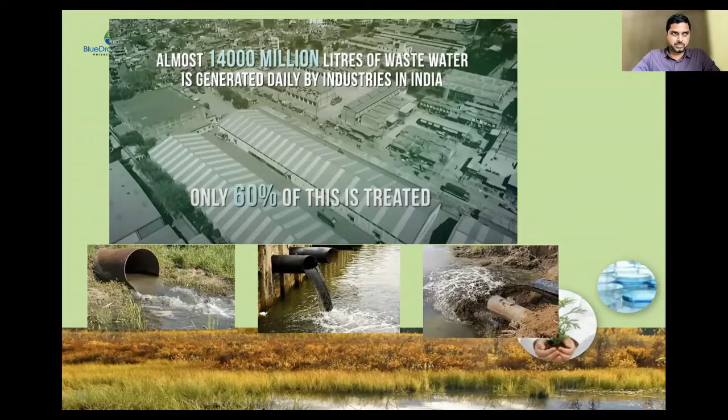So the environmental laws say that the wastewater generated from any source be treated to certain parameters and then be let into downstreams, whether water bodies or nalas, or used for gardening or other reuse purposes. There is a legal binding for every institution, whether academic or non-academic or industry or a residential complex. I think if we have more than 40 families living in an apartment complex, you are required to treat the wastewater.

So while the law prescribes that we need to treat all these waters to this level, I personally feel it is our moral responsibility, our commitment to the future, that for all the resources we are using, as much as possible, we have to resolve the pollutants and make them available for future generations free of pollution. So it is a responsibility from the citizen side too, and from the institutions, whether legality demands or not.

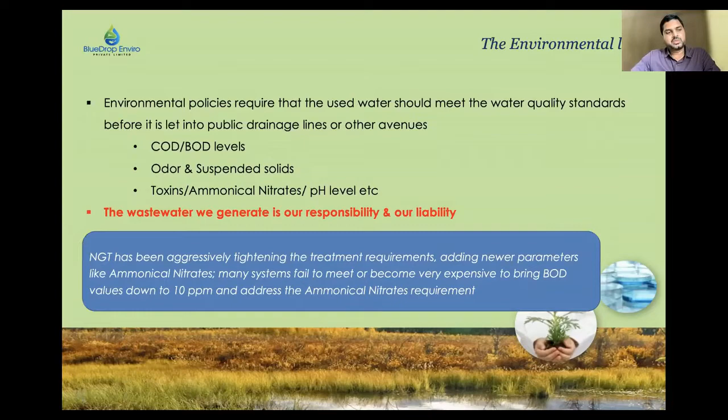There are several conventional treatment systems that have been in place. India has adopted these technologies from various countries back in the 90s or early 90s. Before that, we haven't seen greater implementation of these treatment systems. But when we downloaded this knowledge from various places, we started implementing this left, right, center, sometimes with understanding, sometimes with not so much understanding. As a result, Naam ke vaste several systems have been set up, but not many are functional. I'll explain the reasons as we go through these presentations, of what is the source of these issues.

As people who are interested in a practical future for your own lives, are you all students from the mechanical engineering department, or are various departments here? Is there anybody from various departments? I think various departments. Wonderful, good to know that.

So as you see a career in real life, it is very, very imperative for you to understand the science and technology ahead of time, apart from your academics. It helps you really focus yourself on what you want to achieve. But

the systems that have been implemented widely across the country have been producing results, but partially. The main systems that we have observed in the market are dealing with chemical treatments, especially when it comes to effluent treatment. And there are electromechanical treatment systems, which are called SBR, sequential batch reactor, MBBR, ASP, and membrane bioreactor. These are very popularly used in both residential and some of the industrial segments.

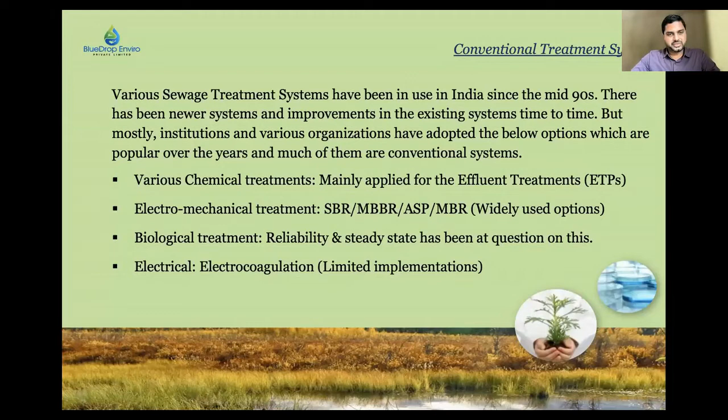On top of it, every now and then we hear about biological treatment systems. There are many success case studies, but the reliability and steady state, as mentioned here, has not been very well established. So people are not able to rely completely on biological treatment. It has to have a combination of things. And of course, there is electrocoagulation that is widely used in some of the industries, but it's very limited in its approach.

So if you have not seen treatment plants, some of them look like this. Some of them can be better than this in terms of their look and feel. Some of them can be more compact than this, because at least 5 of these 6 places I have personally visited and taken these pictures myself. You can gather a lot of data just by seeing these images: these are built with cement and concrete, there are steel structures, some equipment, some pipelines, and the water is visible, and water is moving and is being churned.

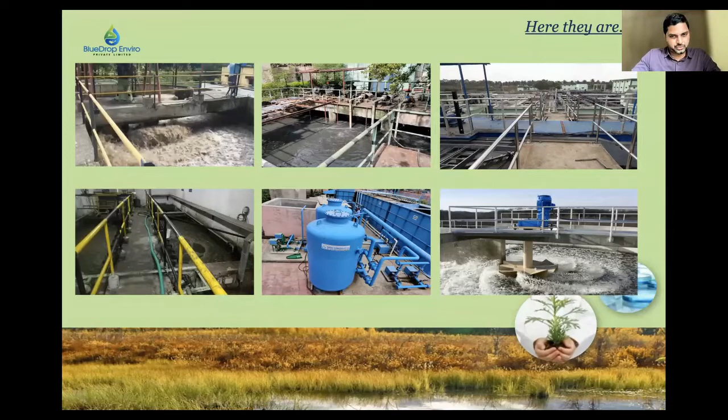What else do you see? Anything interesting? Somebody says, I'm seeing blue color. That's all right. There are filters, right? So this is a combination of several things displayed here; these are all the treatment systems that are treating the wastewater. These are the conventional mechanical systems. They are addressing the problem, as I said, but not in a holistic way.

What do you mean by a holistic way? This word is used in many contexts in life. Holistic approach to education, holistic approach to problem solving. Here I'm talking about a holistic approach to wastewater treatment. Somebody wants to say something? What is holistic? Overall. Right. Anything else?

Well, we move on. So when I say it's not in a holistic way, somewhere it is not covering some aspect that is connected with the treatment or the environment or the overall picture. So there are some critical decision-making factors that we need to look at before setting up a system. We can learn about this in the next slide. An integrated approach, absolutely. Integration means bringing everything together, making sure one is not taking a beating because of something else. So that integrated approach is missing in many of these plants. The real concerns on finalizing a technology, choosing a technology, implementing a technology come here.

The first and foremost thing is people still call us a developing country. And many of us don't deny that. We are still developing, we are still learning. Finance is one of the most important criteria for us in deciding anything and everything, whether you want to buy a car or a scooter or join a college; in other ways, finance plays a major role. In some places, finance can take a second role and quality takes the first role.

So these are the real concerns that we have to observe in understanding a system, designing a system, or choosing a system. We talk about sustainability everywhere. We talk about sustainability as youngsters. Now, when you go into real life, you start to build your home, you start to take employment, get married, whatever. The first matter that comes is, can I sustain my life with the income that I have? What do you mean by sustain? It's not about just paying your rent.

Sustainability has multiple pillars. In environment, when it comes to wastewater treatment systems, we define sustainability as given here very clearly. While we treat the water to provide clean water and a healthy environment and do not disturb the equilibrium, a sustainable system has to be economically viable. Socially, it must be acceptable. Technically, it should be appropriate. Institutionally, it should be appropriate, and it should protect the environment and natural resources.

People ask, what is being socially appropriate or acceptable? We develop a colony, there are 200 plots, and one of the plots I allocate for STP. I bet nobody would come even close to the STP. Nobody will buy those plots because socially these are not accepted. They're not acceptable. So these are the various factors that we need to look at and meet at a place where it is comfortable for all of us to call it a sustainable system.

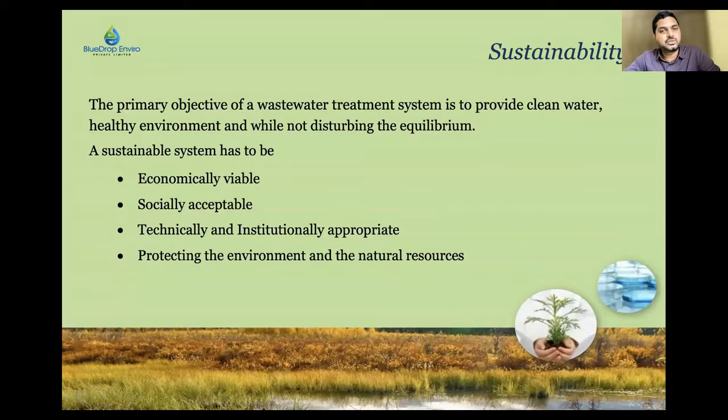A lot of people loosely talk about green technology. And when you ask the definition, it is what is shown in the dictionaries. It's technology which is intended to mitigate or reverse the effects of human activity on the environment. Often clean tech or green technology refers to technology that is considered environmentally friendly, based on its production, process, and supply chain. While it's being produced, while it's being processed, and even in the supply chain, nowhere is it to disturb the equilibrium of the environment.

Supply chain, I just take a simple example. Every second day you're importing things from, say, Delhi or Varanasi or Jaipur to Bangalore. This whole supply chain has so much carbon footprint because of the trucks carrying such loads of stuff that is being used in Bangalore. Rather, we should be using stuff that is locally available, so we minimize this carbon footprint from the entire supply chain. So that's what is called green technology, that uses natural resources, locally available resources to provide the required service.

Now, to jump back a bit, the water that we use, how many of you know how much water an individual uses per day? Any of you have any answers? How much water does an individual use per day? Are there any norms around average consumption?

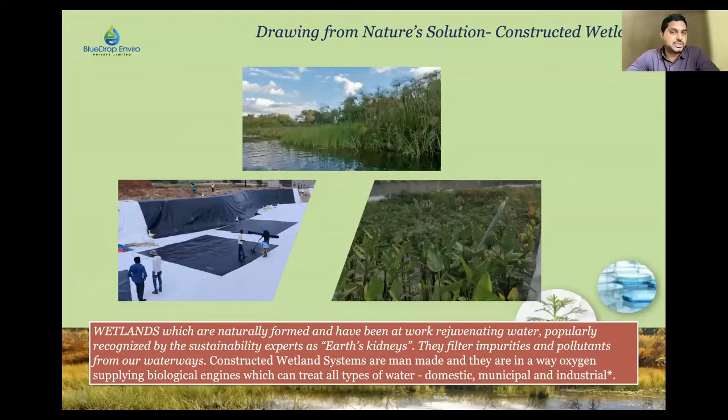They are oxygen supplying biological engines which can treat all types of wastewater, domestic, municipal, and industrial. It cannot treat all kinds of industrial waters, but water analysis has to be carried out and it has to be deployed knowledgeably.

So as a company, we have done a lot of research. We have implemented these systems across the country. This is one of our partners from Denmark. He has done more than 1,100 projects on this technology. His name is Rene Kilian. These are some of the systems that we have built in India. He had come to India and seen the system. This is how the plant growth has been very impressive.

What we practice is something much more advanced. It's called aerated wetlands. Aerated wetlands are one step above the natural constructed wetlands, where we provide some kind of aeration at the bottom of the wetland. We use mechanical equipment, but with very insignificant power consumption and lower capacities compared to a conventional system. But these are helping us reduce the footprint, because India is in great trouble because of real estate challenges. We cannot have a lot of land available for systems.

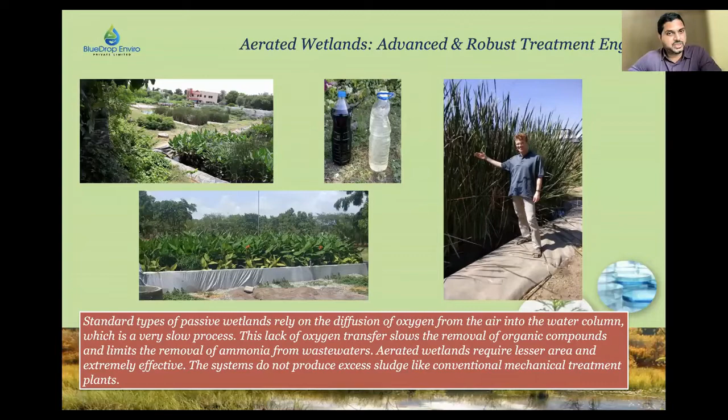For that reason, to make sure the wetlands propagate, we have taken this technology, brought it into India, and started implementing it, where instead of using 1,000 square meters, today we are using about 100 square meters. We have reduced the space requirement by 90%. Earlier, for every 1,000 liters, we used to take about 10 square meters. Now we are taking about 1 square meter, but it depends on the pollution and what is in the water. So these are some of the systems.

When we compare the technology, the aerated wetland systems that we practice are natural and take minimal power. The electricity consumption is very minimal. We never dose any chemicals into these treatment systems. Then there is something called sludge. What we need to understand is when you get organic and inorganic matter into the water, whatever is not digested becomes sludge.

In conventional systems, you actually dose agents like alum to coagulate and create heaviness in the suspended solids. They all settle down at the bottom of the basins, and the supernatant liquid is taken out and treated. All the sludge that is accumulated has to be extracted from these basins. It is compressed, sometimes heated, then carted out to other places. Sometimes it can be used as manure, but many times it may not be suitable as manure.

So sludge handling is a big nuisance in treatment systems. Some places you have to handle it every day, some places every week, but it's an additional expense and additional effort. It also takes energy and requires footprint because you're dumping it constantly somewhere. In these wetland systems, you don't have to deal with the sludge, because the majority of the sludge, which is organic, gets consumed in the system itself, so it doesn't produce any secondary pollution.

The maintenance cost is low to medium. You don't need any highly skilled manpower here. A part-time gardener can run and take care of the system. There are hardly any repairs and maintenance. It never breaks down; there is nothing there to break down. Effective life can be up to 40, 50 years. I have seen a system in Philadelphia built in 1954. Till date, it is functioning. It's almost 67, 70 years.

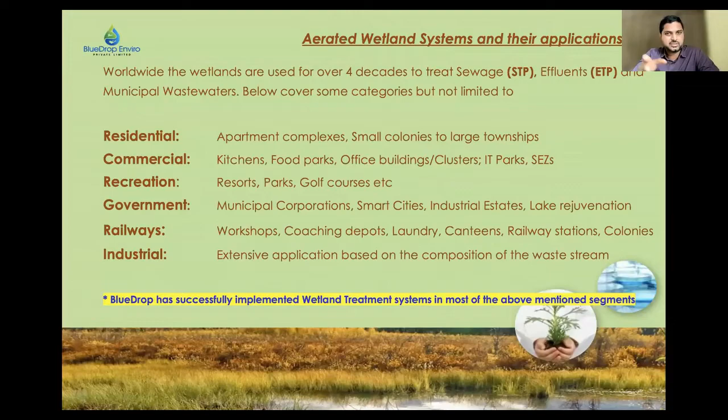We can use this system. You can use them in residential complexes, small townships, large townships, commercial kitchens, food parks, office buildings, recreation. You can put them in parks, golf courses where a large amount of water is required. They are deployed in municipal corporations, smart cities, lake restoration, railways, industries. We have implemented them at all these different places written here.

But unfortunately, the awareness has been very minimal. That's why we do not see a large number of systems in the country. There are very few. Even those few systems that are built, I've visited some other treatment systems established by various companies, show a very poor understanding of the science. It is not about growing some plants. It has to be calculated, for every square meter, how much load can be treated.

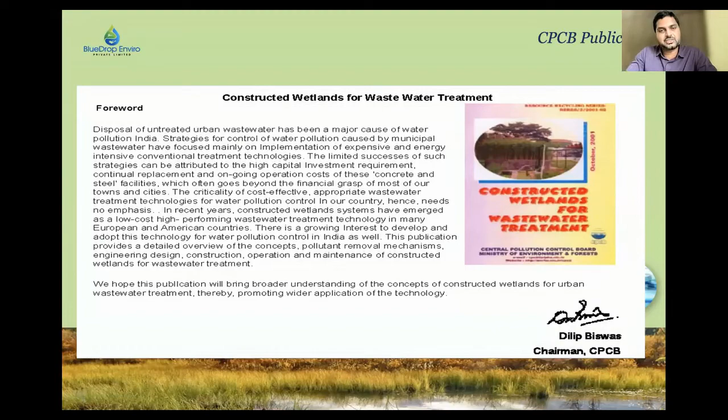We have started practicing aerated wetlands versus passive wetlands. Passive wetlands are what we have done for about 4 years now. Since 2 years, we started going towards aerated wetlands because we have seen this clogging in passive wetlands. We have seen odorsome situations in passive wetlands, and they also require a lot of land.

And in some cases, you have designed the system for 150 BOD, but tomorrow you see that the BOD is coming at 250. Now, what to do? You have no recourse. So these aerated wetland systems provide the opportunity to fine-tune the aeration by a few more hours, and then it addresses the additional pollution. So there can be a lot more control when you implement aerated wetland technology compared to passive wetland technology.

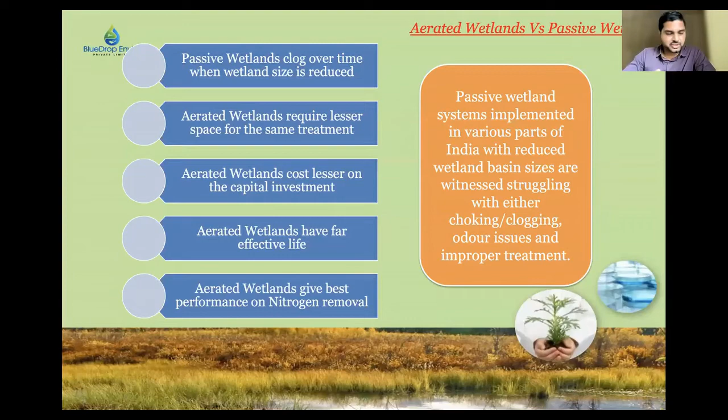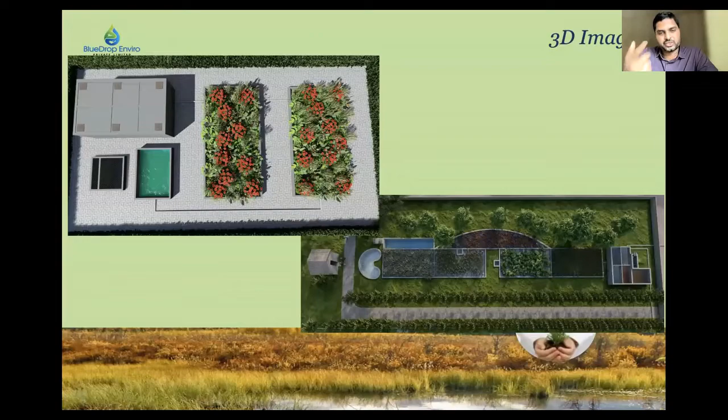They're called wetland cells. The bottom one is a system that we have implemented with Western Railway in Ahmedabad. This is where we wash railway coaches, and there is fecal matter coming from the coach toilets, and all the dirt and floor wash comes into the water, and that water we take, treat it, and make it completely reusable. We send it back into the lines to wash the coaches again. It's a very successful project we have done.

This is a Nala application where one of the district collectors wanted to do a pilot scale. So we intercepted this Nala, took the water into that white holding tank, and then fed it through the wetland system. And this produces clean water. There is hardly anybody there to maintain it. It continues to function.

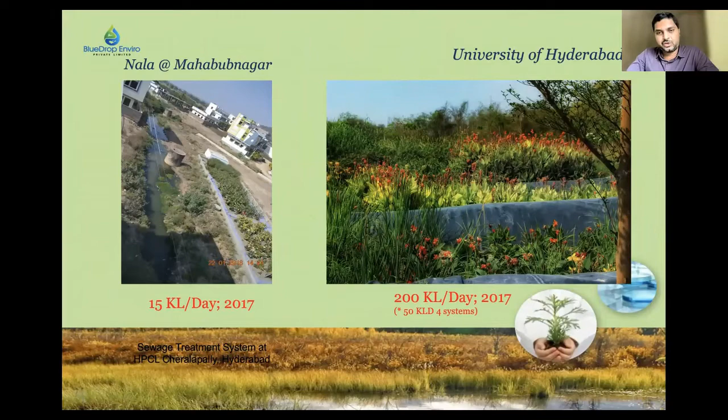This is University of Hyderabad. Unfortunately, the system doesn't exist now, but when it functioned, this is how it looked. It looks like a greeting card. Very rarely can anybody recognize that this is a treatment system.

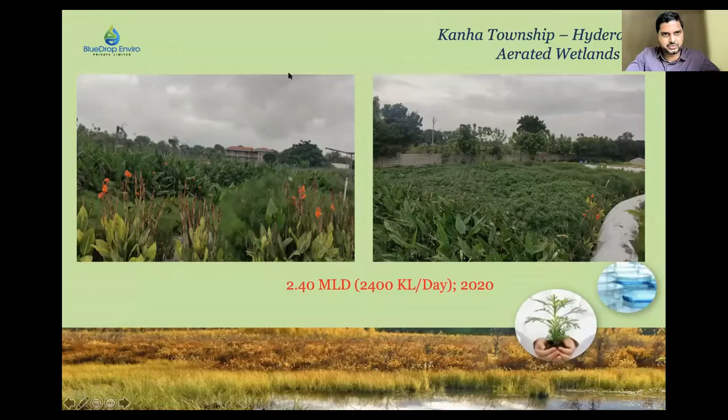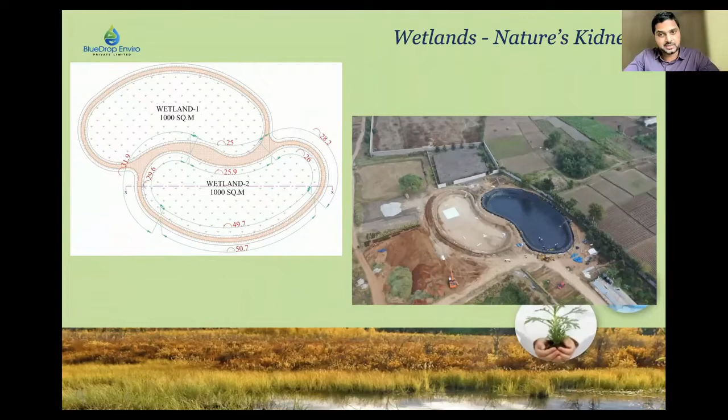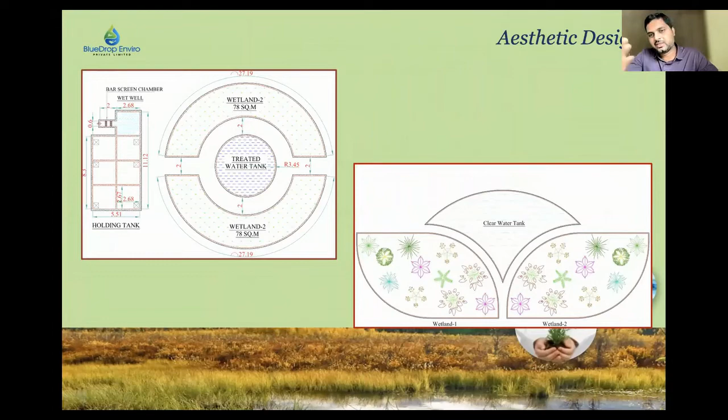Then this system that I just showed you, you may not understand what the system is. You can see the curves. Actually, the design is this. We talked about wetlands as the kidneys of the earth. Taking the inspiration, we wanted to create the system in a kidney shape. So here is the system. That was a drawing. People thought, is it really practical? Yes, we did it. That's how the drawing is, and that's how the implementation is. In some places, they wanted to have a lot more aesthetics. It looks like a park. Yes, we designed systems in a way they all look like parks and they blend with nature.

Some place where they didn't have land, and they said we need to get this, this is for a high court building in Nagpur. They wanted to create a system in 60 square meters. They wanted a wetland system. So what we did is a G+1 structure. At the bottom, there's a wetland. At the top, there's a wetland.

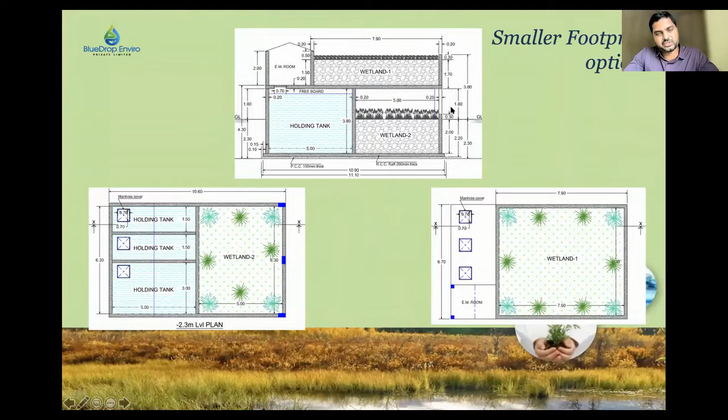There's a holding tank. You can see the ground level here. Part of the holding tank is below the ground, part is up. Then we have wetland here. All these sides are open where it receives the sunlight, and on top it's all wetland. So we can design systems in many different ways.

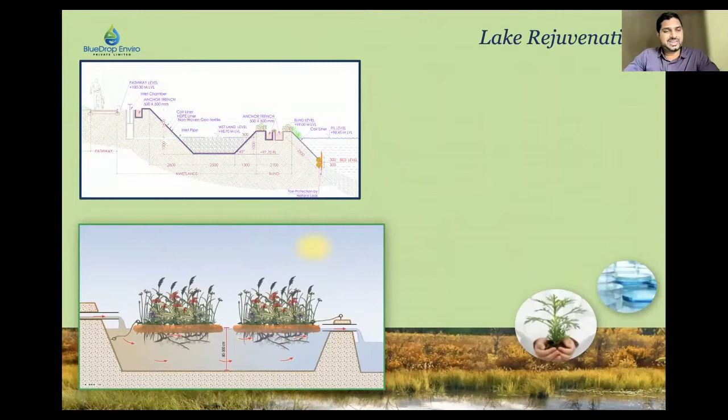And then this talks about lake rejuvenation. Every lake is receiving sewage in India. So we can intervene in this lake scenario, feed it into the wetlands, treat it thoroughly, and then release every drop of water back into the lake. But no drop of water goes without passing through the wetland system. So these are some of the systems we do.

Floating wetlands. Some of these floating wetlands are so robust. These are not those YouTube videos and WhatsApp videos that are getting circulated everywhere saying we did floating wetlands and they're functional. 90% of these videos are, I would not say fake, but most of them do not work.

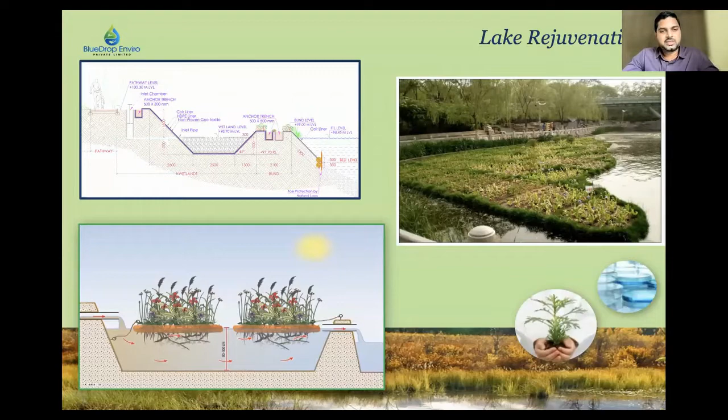It depends on how much root biomass you're able to create per square meter or per cubic meter of water, because bacteria has to be in that proportion. Only then the treatment happens. Otherwise, putting some canna plants on floating thermocol doesn't treat. This is far behind when it comes to engineering such practices. So specifically, I wanted to talk about something.

A lot of us have gone through phase 1 and phase 2 of lockdowns because of COVID and the anticipated third wave. What do we do? How do we do it? We all have to pay attention. This is not a professional forum, but just for your information, the residuals of all the antibiotics that we take go into the water, and through extensive studies at IICT here in Hyderabad, in the US and many other places, they found SARS-CoV virus traces in the wastewater.

If a COVID patient is at home and defecating, obviously the virus is traveling along with the urine and fecal matter, and that goes into the treatment plant. And naturally, if somebody is touching this water, we are standing in danger there. If you remember the images I've shown you, where wastewater treatment systems have large basins and this water is being churned to provide oxygen, naturally, now the virus is in the water.

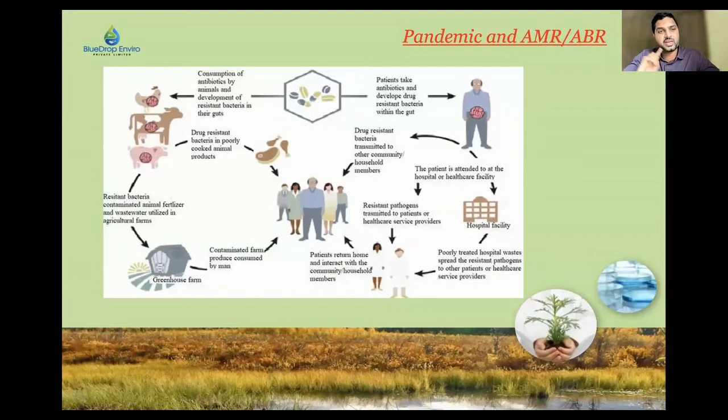And a lot of us do believe now that COVID is prevalent in the air also. So we have to be very careful handling wastewater in these COVID times. Today it is COVID, maybe tomorrow something else, but our treatment systems should be designed in such a way that the water is never exposed to ambient air. There should not be a need for anybody to put their hands into this waste. Everything must be automated. Only the final water should come out, and that water should be free of any pathogens or virus traces.

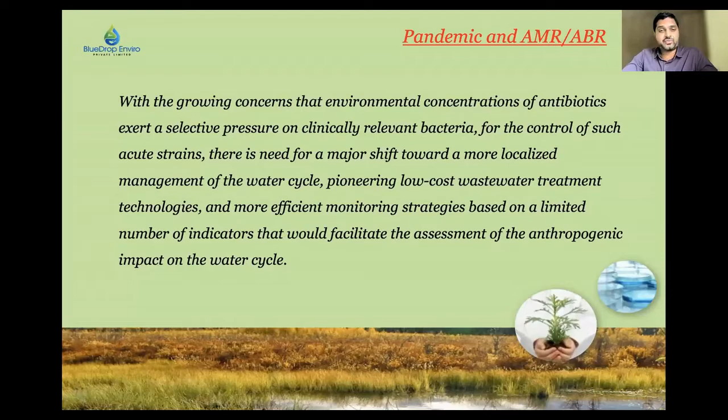So there are growing concerns that environmental concentrations of antibiotics exert a selective pressure on clinically relevant bacteria. There is a need for a major shift towards more localized management of the water cycle. If you did not treat your wastewater properly and you let it go into a water body, now the entire water has virus traces. So we have to be very careful handling this wastewater, and there have to be preventive mechanisms.

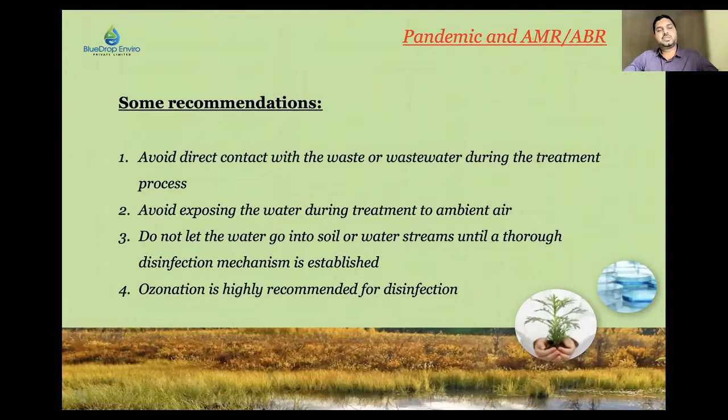Some of our recommendations are: avoid direct contact with the wastewater at any time. Avoid exposing the water to ambient air during treatment. And do not let the water go into soil or water streams until a thorough disinfection mechanism is established. We highly recommend ozonation of the treated water as a tertiary treatment, so there is no trace of any biological presence. So these are some of the things I wanted to share with you about our company.

Since they have seen this for 30 years, we derive a lot of experience from them on various nuances, how systems function after a 10-year, 15-year period, which we have not seen in India. So these are technological consortia. We do STPs, ETPs. We are also experts in fixing STPs, like, you've set up an STP already. There's a mechanical system present, but it has odour. You don't know what to do with it. We know what to do with it.

And the water is not getting treated sufficiently. BOD is getting stuck at 40. Now we don't know what to do with it. So there are methods and easier ways to actually augment the treatment efficiency to bring it under Pollution Control Board norms. So these are some of the applications that we have. Then, as academic interest, we are members of various societies across the world that are focused on wetland science, and we have also filed a patent for our work here in India.

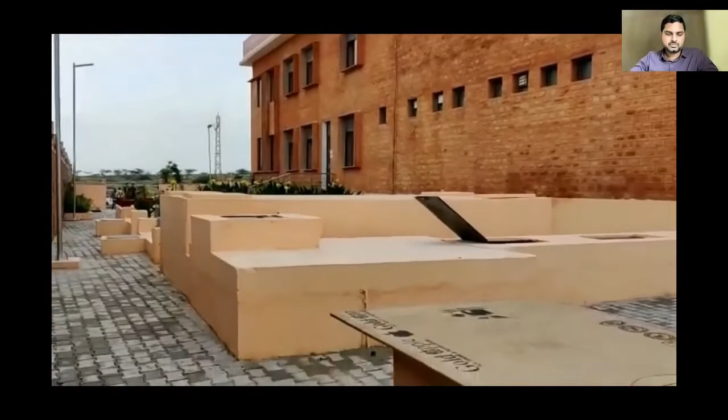Okay. We are at ICICI Rural Self-Employment Training Institute, Jodhpur. This is a building built by ICICI on complete green principles. It's a 100% green building. This is getting inaugurated today. We are here at the northeast corner, looking at the building's outside view and also overseeing a 20 KLD sewage treatment plant, which takes care of all the wastewater coming from the canteen, kitchen, and human consumption.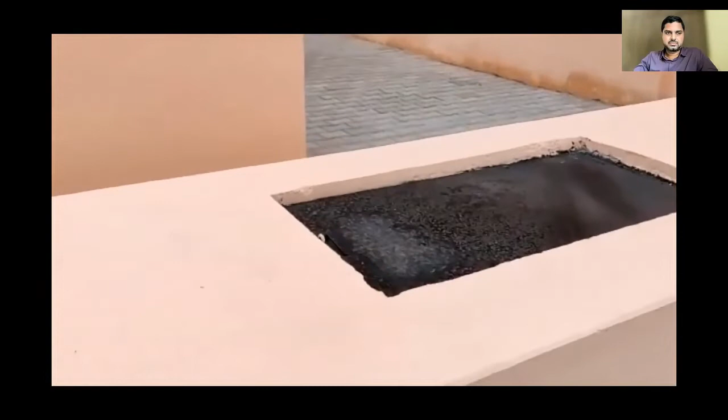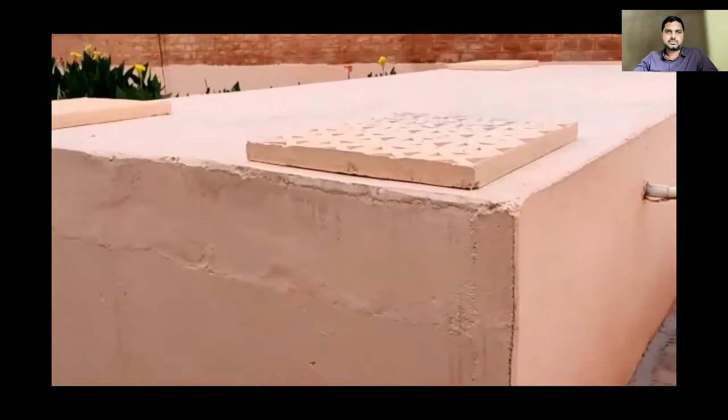The water gets into this screening chamber, where it gets filtered for all kinds of plastics or solids if they're coming in with this waste, and then goes into this wet well. The wet well is closed. There is a pump installed here to do single-stage pumping into this holding tank. This holding tank has a 1-day retention. Then the overflow goes into these wetlands.

Here is the first wetland. This is a very newly built system. It's getting established, so we don't see enough population of the plants, but it's performing already. And then from the first wetland, we have an inoculation tank, and it goes into the second wetland. The system is well established. Plants are growing well, and the water is already being used for gardening and other purposes here. Part of the water goes back into the flushing.

So it's been 3 months the system has been operational. Probably in about 3 more months, you will find a lot more diversity in terms of the plants. We did the plantation during summer, so some of the plants didn't survive due to lack of water. We will take a shot in another 3 months and probably get an updated video. Thank you for watching.

Now the question. 1 second, sir. I'll play another video for you.

As the operation and maintenance cost of STP is much more than the installation cost, then what to do? You can't help it, sir. That's the nature of the beast. If you buy a car, Skoda, and it gives you 6 kilometers per liter, we can't help it. That's how the system is designed. So before setting up the system itself, we have to be cognizant of the cost involved. So accordingly, we have to choose the system.

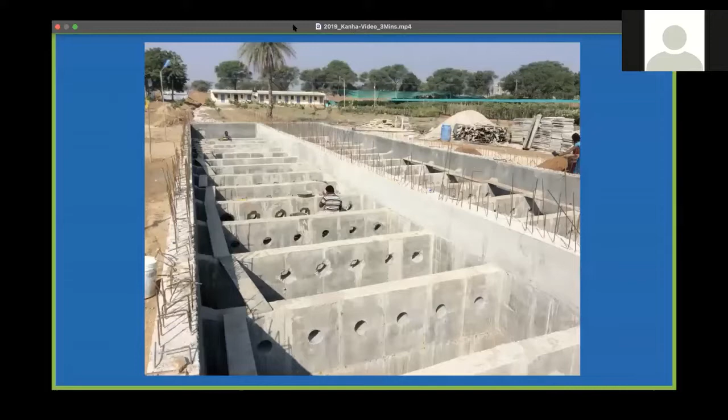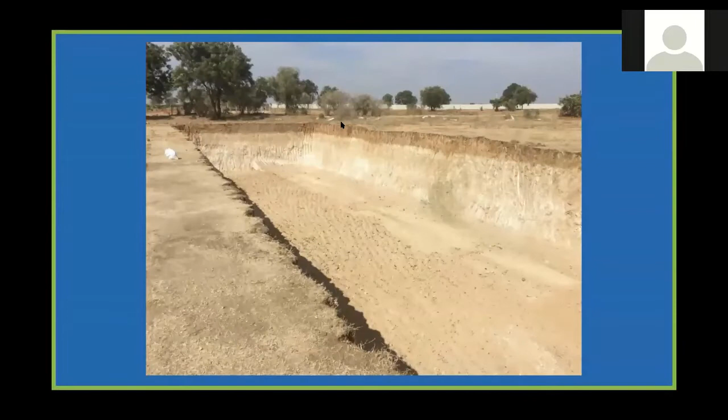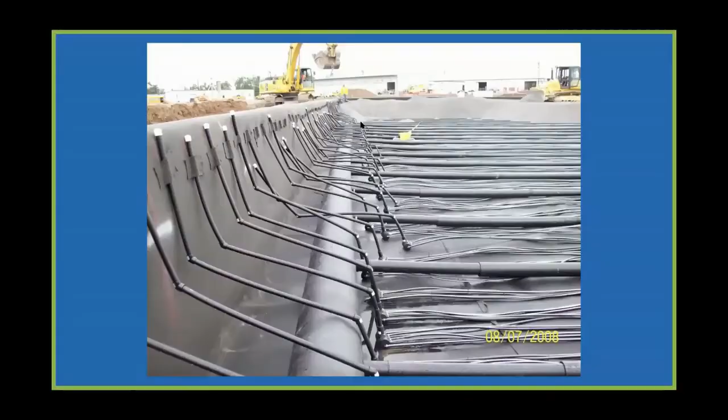Welcome to Blue Drop Enviro. Today I'm going to take you through a live video of one of our sewage treatment plants in Hyderabad. You can see the wastewater coming in from various sources into this holding tank. This holding tank is designed specifically for sewage treatment functionality through constructed wetlands. Here you can see the first basin of the constructed wetlands having healthy plants, and they have grown close to about 9 feet tall. These are surface ponds. You must be wondering why this is gravel, what is this liner? See, the whole principle is that this wastewater shouldn't get in touch with any soil, causing soil pollution. So we line these surface ponds designed for the wetlands with HDPE liners and geotextile liners. And the entire hydrology is designed based on the pollutant level within the wastewater.

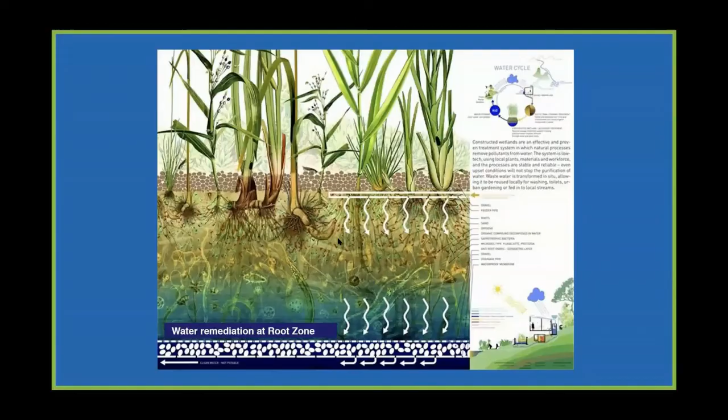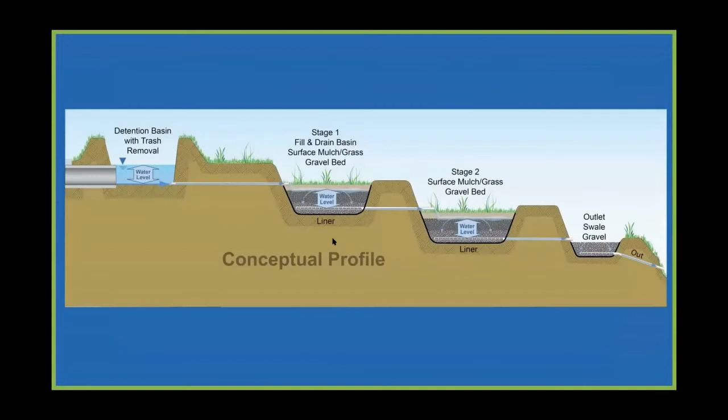You can see the extent of the treatment plant. There are various sections of different plantation you can see. Anybody passing by probably feels that this is a park, may not even notice that there is something happening at the root zone. The entire action happens at the root zone of this treatment plant. These plants are aquatic plants. You can see the tubular structure of this stem. This plant that we are seeing is Cyperus papyrus. You have heard about paper. So paper was produced out of these papyrus plants in the olden days. So the gravel is installed in different layers ranging from 10 mm to 60 mm, and the pipelines are laid below the gravel, and various species of plantation is done.

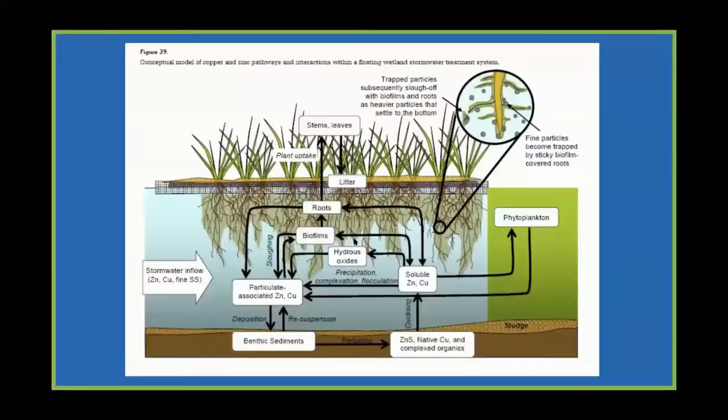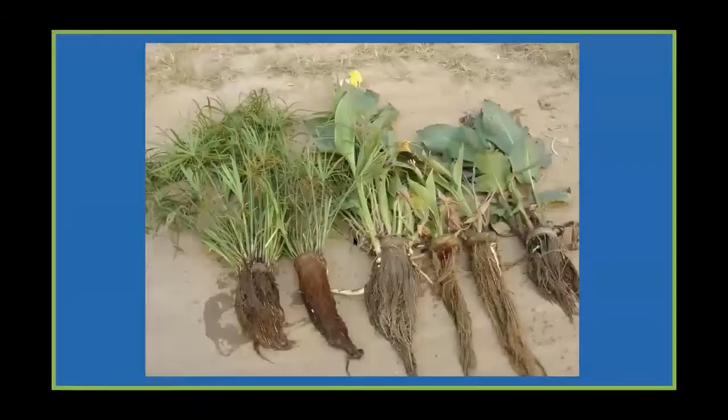The way these plants are thriving, if you take the same plant and plant it over ground in soil, it wouldn't grow this much. These plants thrive on these pollutants that we don't like. Well, they are thriving, but at the same time they are remediating the water. In these constructed wetlands, we don't separate the waste from the water. We actually remediate the waste. The sludge is consumed in the holding tank partially, and at the root zone of these plants, there are microbial colonies that develop and proliferate significantly. And we provide a large surface area for these microbes. That's where the pollutants settle, and then the microbes act on them. And the roots are so well established in this gravel that a microfiber root system develops at the root zone. This is a Canna species plant. You can see the flowering.

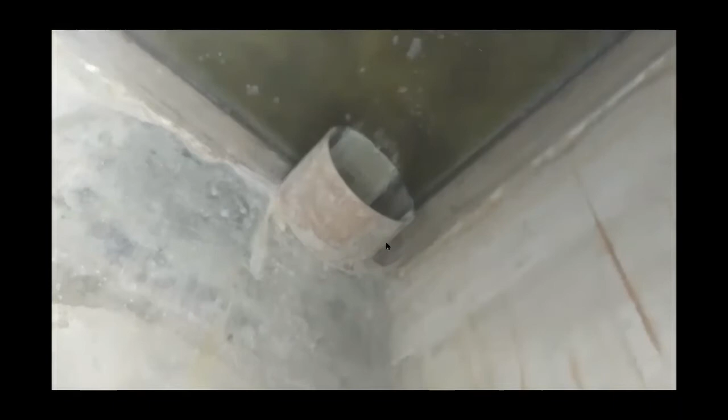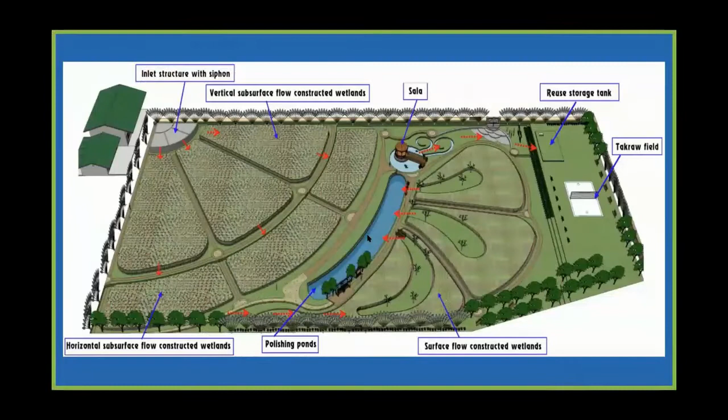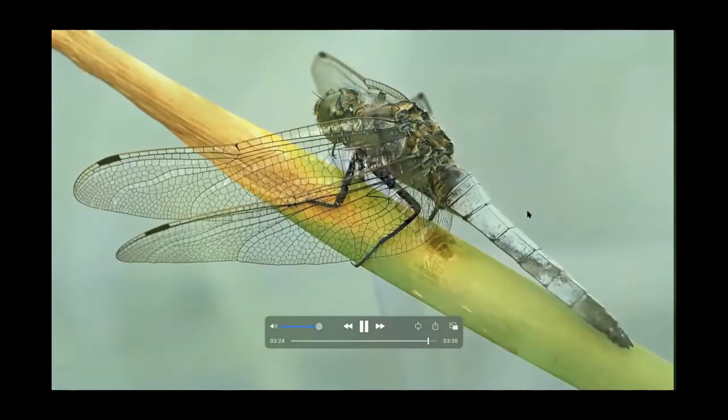So while I was describing this root system, at the root, these plants release hydroxyl ions. Nascent oxygen is available. That's where the majority of the water remediation happens, along with the microbial action. And you can see the output quality of water. It's odor free, color free, and meets the PCB norms any day. The BOD levels are way below 30 and COD below 100. In this system, we have never used any chemicals. There is no mechanical equipment present, and you don't need any technical people here. A lot more can be spoken about this, but for want of time, I would conclude that this is the most natural way of treatment, and it is sustainable and economical. It brings a lot of biodiversity and ecological balance together while treating the water, which is the primary cause. Thank you for watching this video. Any questions, please contact us to take it forward. Thank you.